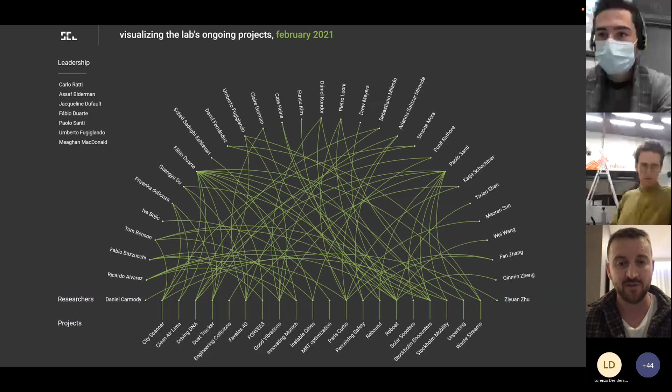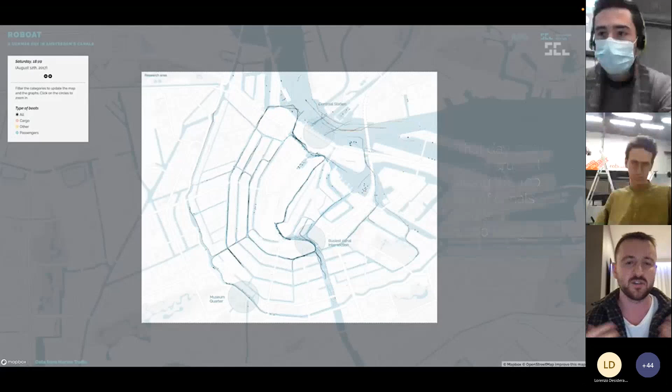The project is based in a very complex environment, the Amsterdam canals. These days the canals are mainly used for social boating and tourists, but historically they were a huge part of the urban fabric in terms of logistics. Over time this shifted to the streets. So what we're trying to achieve with Roboat and digital technology is bring back this importance to the canals of Amsterdam by creating the first fleet of autonomous vessels.

I'm going to play a very short video explaining a little bit more about the overview of the project and also the two full-scale prototypes that we've built.

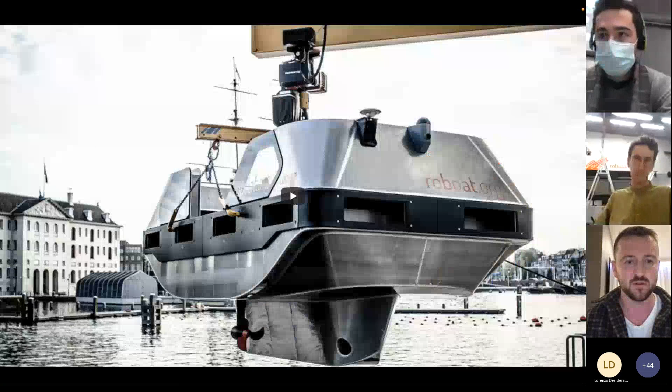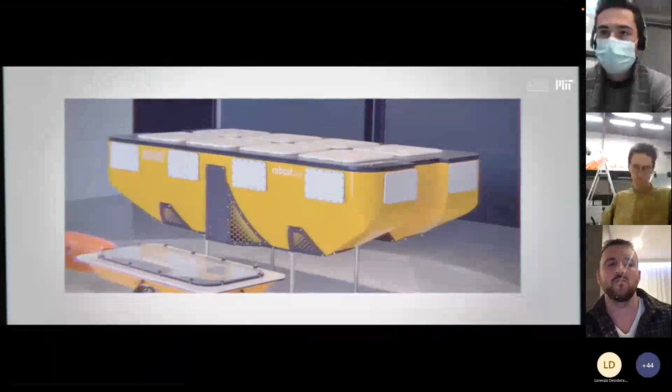This is Lucy. Lucy is a Roboat, a fully autonomous, zero-emission boat that operates on urban waterways, and she can change the way cities work. As congestion and emissions continue to rise while cities continue to grow, the existing infrastructure of many cities struggles to keep up. Roboats offer a solution by moving road traffic to the water, bringing passengers from A to B, or as an on-demand boat taking you anywhere you want. They can also help the city as a multi-purpose workboat. Take Crystal. She is equipped to collect household waste to free the streets from heavy garbage trucks. Roboats are fully autonomous, so they navigate without a skipper and can operate 24/7. In order to sail by themselves, Roboats need to perceive their environment and recognize objects such as bridge pillars, floating objects, and other vessels. The primary source of information comes from a LiDAR sensor, but Roboats are also equipped with cameras, GPS, and a digital compass. Roboat's onboard computer combines and processes all of the data and runs the Roboat software so it can successfully complete its mission plan. After 5 years of development, testing, and experimentation, we have now successfully enabled autonomy on the full-scale prototypes. Roboat is ready for the next step. Join us and let's unlock the potential of urban waterways together.

As the video mentioned, there are various urban functions we've been creating with the platform. One is moving people, having Uber-like robots, but also in terms of moving goods and deliveries, we could create on-demand Amazon lockers throughout the city, which would remove the need for large delivery trucks in Amsterdam causing congestion and high emissions.

One interesting use case is actually using these boats to create on-demand, dynamic infrastructure. Instead of having high infrastructure costs for bridges and platforms, these boats can respond to human behavior in real time. Depending on where human traffic is forming, these bridges can help alleviate congestion.

One of our more developed use cases is using Roboat to collect trash on the edge and bring it to the incinerator. Similar to goods and services removing the need for delivery trucks, this also removes the need for trash trucks, a large contributor to emissions in Amsterdam. People would drop trash into Crystal at the port, and it would autonomously drive to the incinerator, constantly collecting throughout the canals.

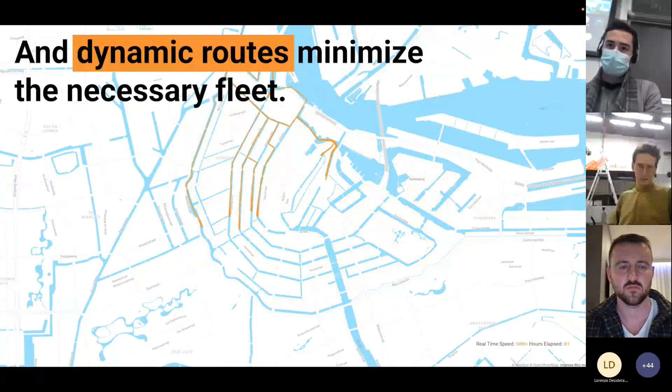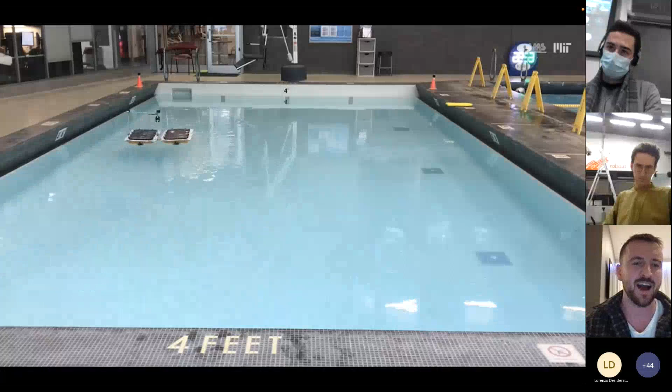Put a little bit more back into the robotic engineering, and we were doing many tests through the first four years in the MIT pool. This is us testing the highly used quarter scale. I think we built over 50 of these little boats, which allowed us to test not only different configurations and shape shifting, but also the navigation.

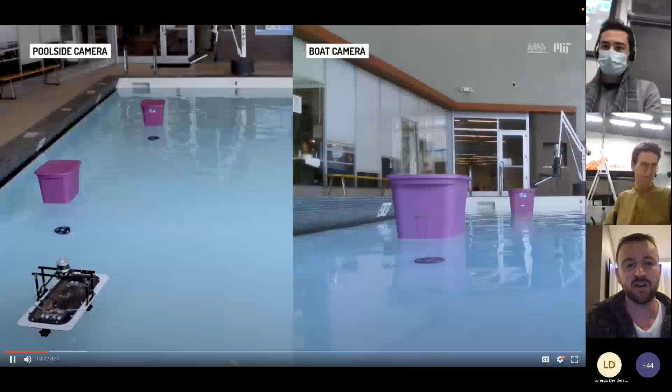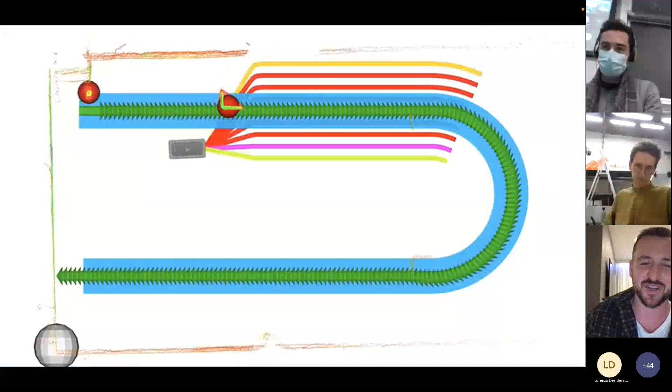And what we did in the MIT pool was to avoid not only fixed objects, but dynamic objects. If you're an MIT researcher or any robotic engineer, I would promote that when you do these algorithms, you put yourself in danger. So on the left, you see these two static bins. And this is one of our researchers, Wei, who was brave enough to put himself on the line to avoid the robot. Luckily his algorithms had worked successfully not to take his head off.

But this is just a very brief introduction into what Jonathan will take a deeper dive into. These boats are basically sensing platforms at the same time. It's not just the case of moving from point A to point B or creating an urban function. It's also a case of trying to utilize the various sensors that we have on these boats for social good.

One of the key ones that we have is actually a water quality sensor that we've embedded into the boat, so we can start collecting hyperlocal water pollution data to start being able to clean the pollution in the canals of Amsterdam. I'm just going to finish on this video, which again is a bit of an introduction into how these boats perceive and navigate through a complex environment such as the canals of Amsterdam.

It uses a combination of LiDAR and computer vision. The LiDAR is just being able to extract distances, and then if you combine that with object segmentation and detection, you're able to understand if it's a boat or a tree.

And like I said, these boats are sensing platforms. So one use case for utilizing LiDAR data is maybe to analyze the structural deficiencies of bridges, or in such a unique context of Amsterdam where you have these 17th century houses on the side, we can actually start to see over time if these facades are starting to shift, creating a bit of an early warning system to structural deficiencies throughout the city.

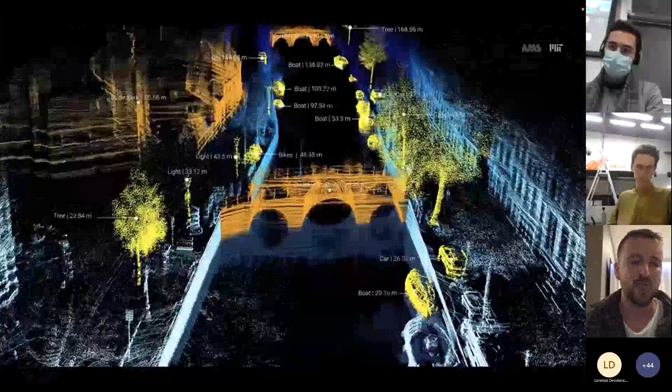You can also start analyzing the ecology of trees, understanding when these leaves start falling off at certain times of the year. So it's really trying to open up more aspects and more questions. What can we do with the data that we collect from Roboat for social good and making our cities more livable?

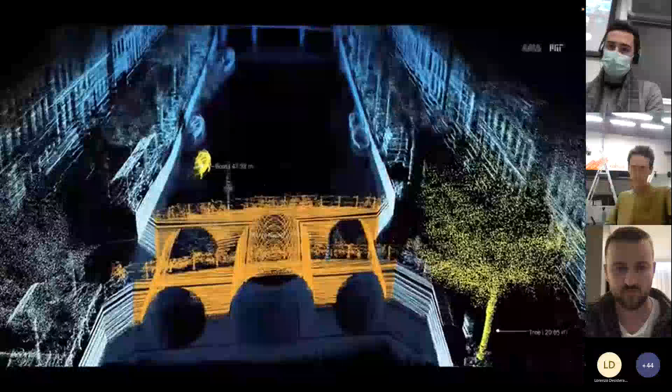Perfect, Tom. Thank you. Let me take over from here. One second. I think I'm not visible anymore. Is this possible? I think it automatically turns off, so we'll have to do with this. You can see my screen now, right? Yeah, we can see it.

Perfect. So thank you, Tom. I'll take over from here. My name is Jonathan, and I'm part of the Amsterdam Roboat team, which is part of the AMS Institute, Amsterdam Institute for Advanced Metropolitan Solutions. Within AMS, we are part of the mobility and logistics track here at AMS.

AMS is located in the city center of Amsterdam. Can you see my mouse, by the way? Is that visible? Yes, we got it. Perfect. So I will point at a couple of things. This is the AMS building over here.

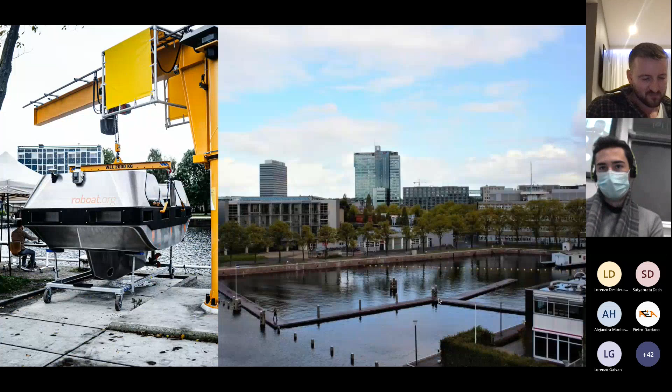And if we take a closer look, we have this nice section of water, which is actually a private area. So we can use this area to test our full-scale boats because we have a nice yellow crane installed half a year ago. Right now I'm sitting here in the second garage door, and whenever we go out testing, we just push the boat out, take the crane, and put the boat in the water. It takes about 10 minutes. That allows us to very quickly validate all the software that we wrote for the boat, which is very convenient.

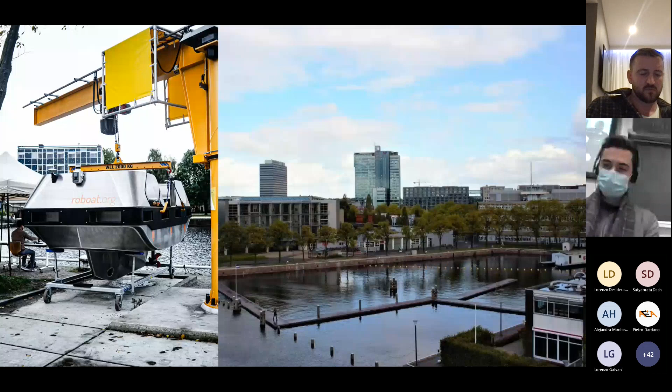I joined the project back in April, roughly 6 months ago. When I got here, Pietro, the designer of the boat, had the privilege to christen the first full-scale boat, called Lucy. This was really the start of the testing period of the full scales. Tom mentioned a lot of testing has been done on the quarter scales, the smaller boats, but the end goal of the Roboat research project was to have full scales operable in Amsterdam. So I joined at a very interesting time.

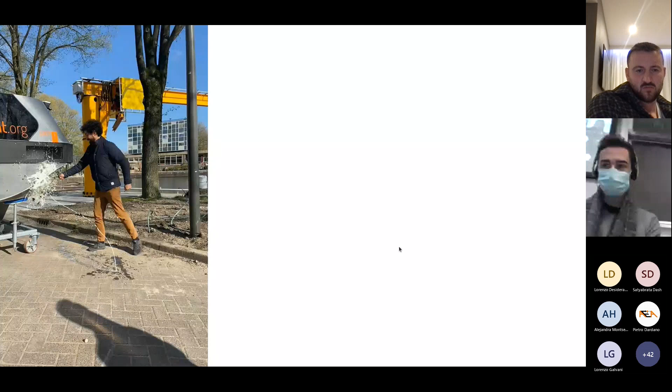Back in October, we had the Roboat demo days, where we showed off the capabilities of our 2 full-scale boats. It was a great event.

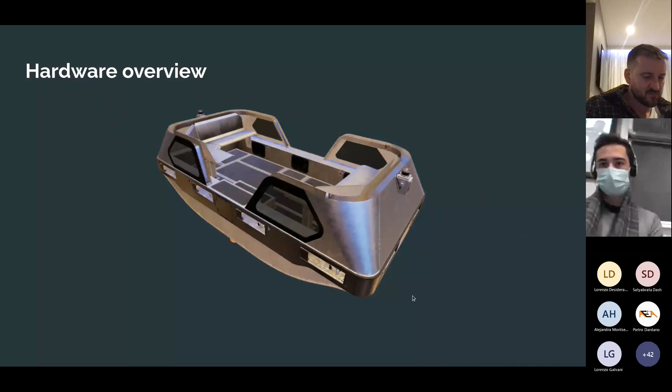Let's see, where are we? Let me first give a hardware overview of the boat, in case you're not familiar. So this is Lucy. What's interesting about Lucy is that she has a universal hull design. Our other boat, Crystal, is equipped with a garbage module, but the hull design is exactly the same, so we can switch the use case of the boat by simply switching out the top deck, which is fairly easy to do. So we have a multi-purpose boat, which can be used for several use cases.

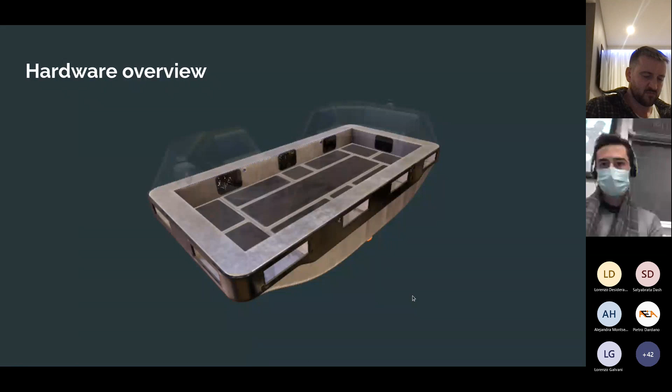More on the hardware side, we have a 10 kilowatt-hour battery, which lasts over 24 hours of operation, and we can even put a second battery in to allow for even longer durations. For the drivetrain, we have 2 main thrusters, which are torpedoes, pointed forwards. Next to that, we have 2 bow thrusters pointed sideways, and this allows for holonomic movement, which is very convenient, for example when docking.

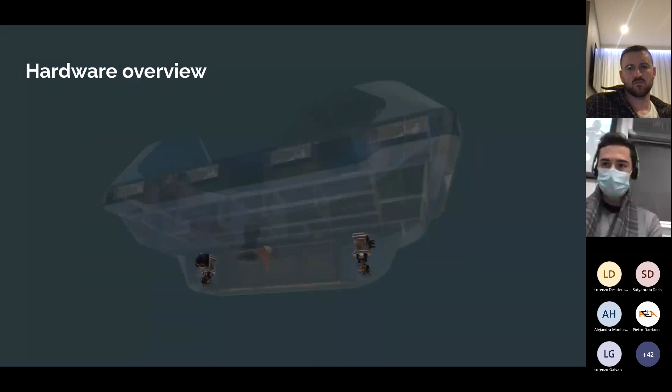More on that later. Next to that, we have a latching system installed, which are mechanical arms that allow the boat to autonomously dock and latch onto the wall. These latches are passive, so the battery can turn off and it can charge itself via capacitive charging. A very nice feature to have.

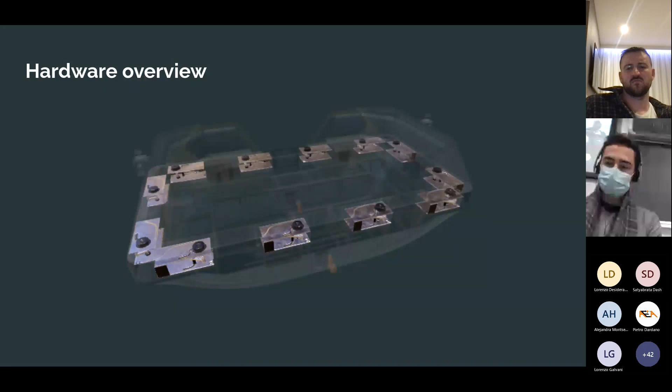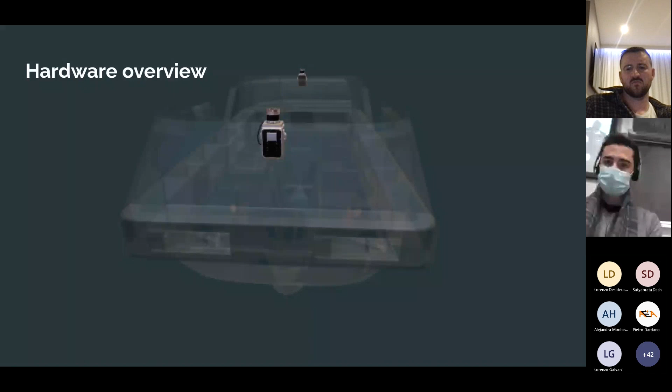Other than that, we have a range of sensors, a couple of them illustrated here. We have a LiDAR. In the black box here is a camera and an IMU. And we also have 2 GPSs for localization.

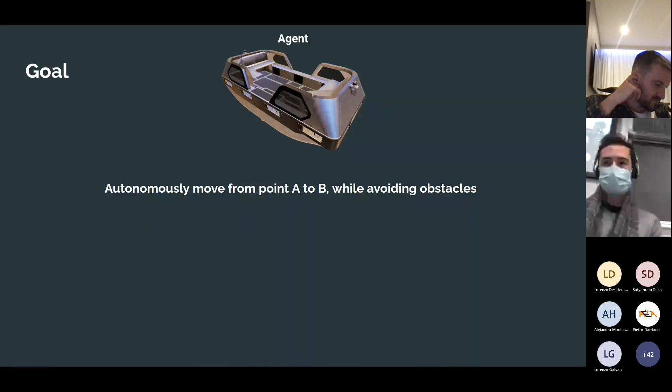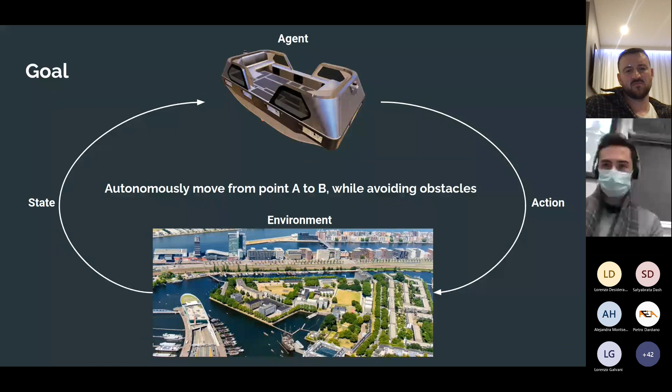And of course, what is the goal of Roboat? It's to autonomously move from point A to point B while avoiding obstacles. We can put Lucy as an agent which has to interact with the environment, in this case the marine terrain here in Amsterdam. She can sense the environment or her state through her sensors, and she can operate in the environment through the use of her actuators, taking action in that. What's important here is that the boat is, of course, autonomous.

So let me run you through the software stack, how we do this. Any regular boat with a joystick or manual controls will have a hardware interface and a UI through which you can interact with it. So let's say we have a boat with 4 thrusters. We can steer her with levers that determine the thrust delivered by these thrusters. However, we want to sail from point A to point B autonomously, and therefore we created the following software stack.

So instead of putting these forces manually into the system, we provide a waypoint, as we call it, to the coordination layer of Roboat. This waypoint is then passed on to the global planner, which is sort of a Google Maps for the waterways. So this will determine a rough path.

Away from point A to point B, as you would get it on Google Maps. And this map is a static map, but of course in the environment there are dynamic obstacles which we need to sense. So this global path is passed on to a local planner, which takes the LiDAR data, constructs a map of obstacles.

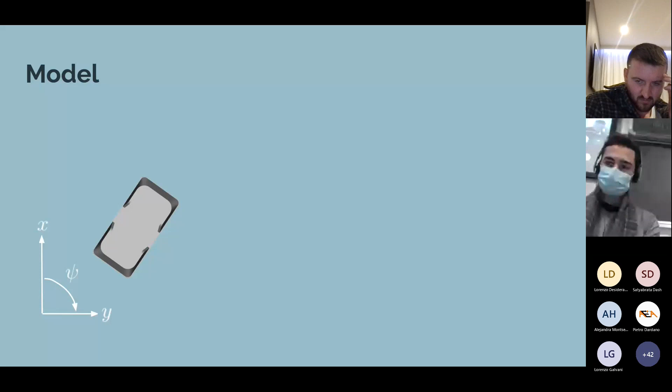The first 3 are in the map coordinate frame, as you can see here. X is pointing forward, Y is pointing to the right, and the yaw is clockwise. So Z is pointing inwards the screen.

Then the second set of states is a bit more involved. These are determined by a similar equation as the manipulator equations. I assume you are familiar with that. The only difference is that V is already the velocities here. So V dot is the accelerations, and other than that, it's the same.

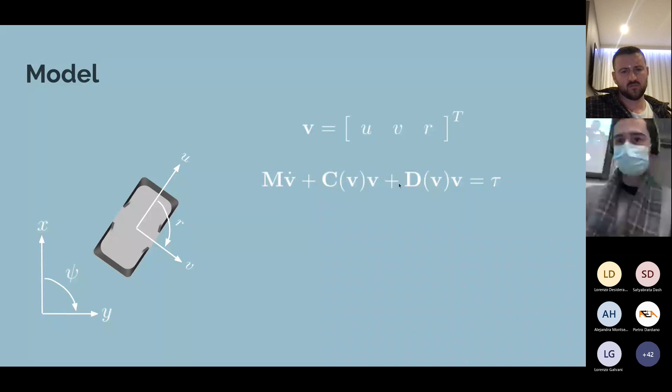What I found surprising when I started this project is how simple this model is, yet how effective it is. So the mass matrix here is just a diagonal matrix with the mass terms on the diagonal. The Coriolis term here, we actually ignore it. So this is 0. And the damping matrix is also just linear terms, which to me was surprising at first.

Since hydrodynamic drag scales with velocity squared. But since we are operating at low velocities, this quadratic term does not dominate yet. We usually sail around at approximately 3-4 kilometers per hour. So a linear term for this damping matrix is perfectly fine. And it's again a diagonal matrix with the damping terms on the diagonal.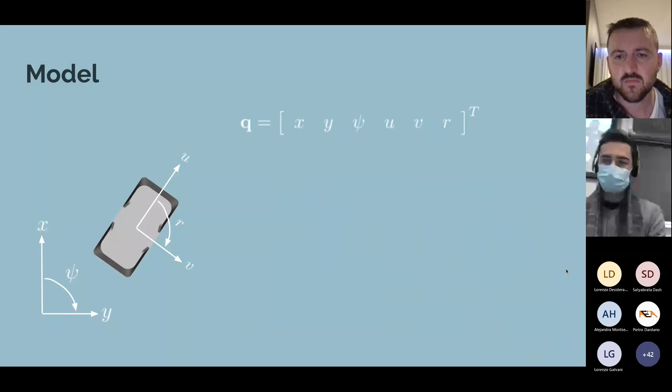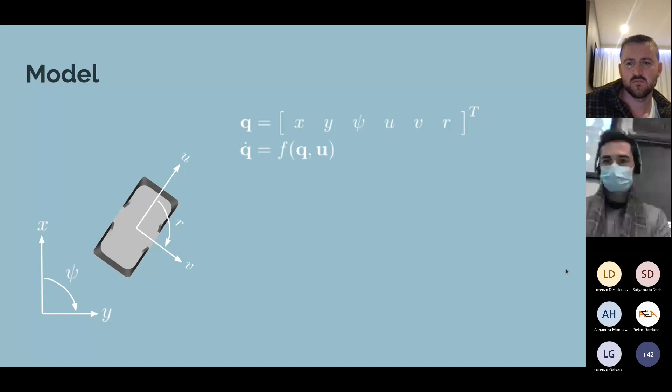That brings me to the full 6-state model we have. So again, x, y, yaw in map coordinates, and u, v, r in boat coordinates. The dynamic model is slightly nonlinear because of those first 3 terms, but the rest of the model is actually linear. This is just a summation of what I just explained.

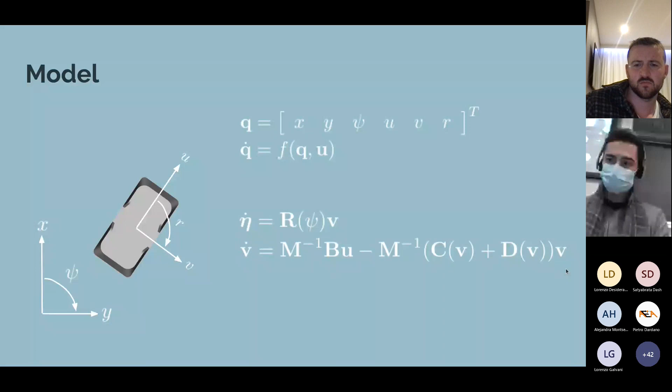With this model, we deploy our control strategy, which is nonlinear model predictive control. I hope you are familiar with model predictive control. Otherwise, I will give a very brief overview, which I hope is clear.

So in order to determine which forces the thrusters need to give, we have an optimization problem with u as the decision variable, and the equation to be minimized is this cost function J here on the top, which consists of the states and the future states of the boat and the control inputs over the control horizon.

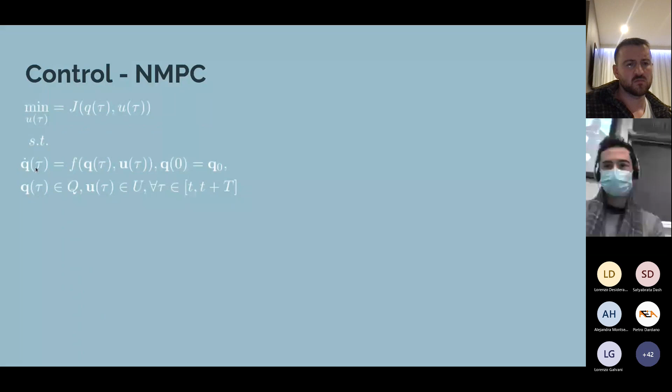And this optimization problem is subject to a couple of constraints. So we have the dynamic constraints over here. Wait, let me first give a better overview of what model predictive control actually is, which is shown here.

So model predictive control at each time step, here time step k, calculates a predicted future of the boat's trajectory and tries with the decision variable u to minimize the error between the reference trajectory and the predicted trajectory. Then if the optimization is completed, the first control input is applied. The horizon is shifted to the right by 1, and we do this whole optimization again.

And this way we can have optimal control with state constraints and input constraints. So coming back to the equations here on the left, this J is the cost function to be minimized, which is subject to the model dynamics, the initial state where we are at that time step, and also to some state constraints and input constraints.

For example, we have a maximum torque on the thrusters, which need to be adhered to, otherwise they will overheat and destroy themselves. So that's not nice. And using this model predictive control framework, we can ensure that the forces are never higher than we want them to be.

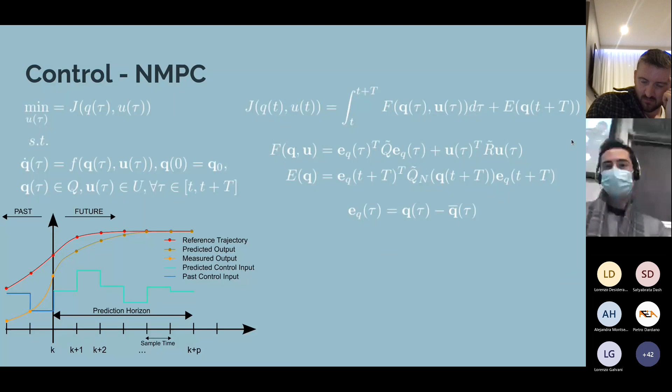And so enough equations. I'll just show you what it looks like in sim, which is like this. Over here you can see the boat in our simulation environment. The green line is a series of poses, which is the path that is given to the robot, and the purple line of arrows is the predicted output.

And as such, we can move through the water and follow the line we give it.

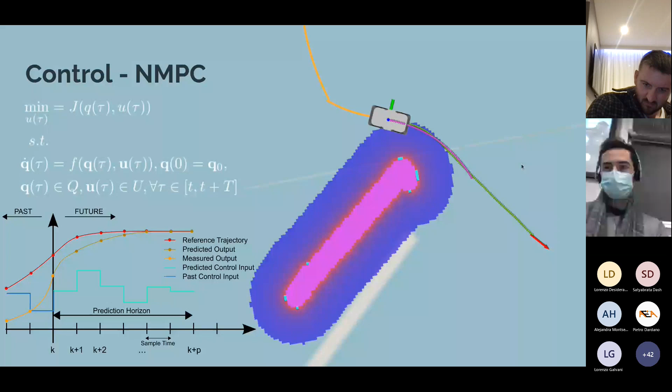Next up, I wanted to talk a bit about how we do localization, which we do with an extended Kalman filter. I presume the Kalman filter is known by control students. The extended Kalman filter is a nonlinear version of the Kalman filter, which linearizes the model around the current predicted state, and then applies the prediction step and the update step accordingly.

What is nice about the framework we use, which is ROS, is that we can use external packages. For this localization, we use the excellent Robot Localization package provided by Charles River Analytics. It is designed to fuse an arbitrary number of sensors, which in our case are an IMU and actually 2 GPSs. I think when I got here, there were already 2 GPSs on the boat.

On the quarter scales, they had a single GPS, but they had a lot of trouble getting accurate heading for the boat, since the IMU is very prone to drift, and it was not sufficient enough for our use case. So the engineers at MIT decided to go with 2 GPSs, from which we can then calculate a normal vector, and that can be used to calculate the heading.

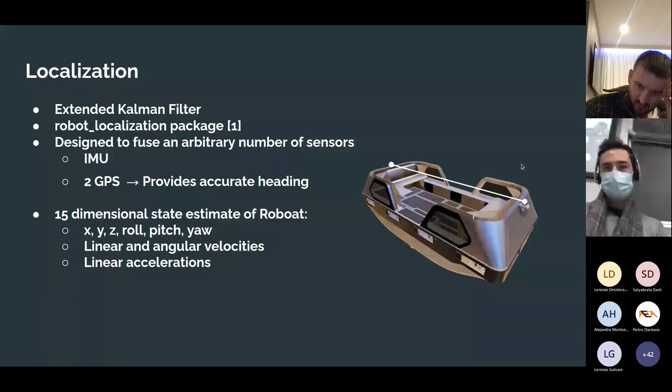Some insights on difficulties we have at the moment: these sensors we use, an IMU and 2 GPSs, are not always good enough at this moment in time. You can imagine, for example, sailing under a bridge, you will lose the GPS signal quite quickly, surprisingly quickly actually, in which case the odometry cannot be calculated anymore. So for that reason, we are currently looking into fusing LiDAR and/or camera data into the mix to provide a more robust state estimation.

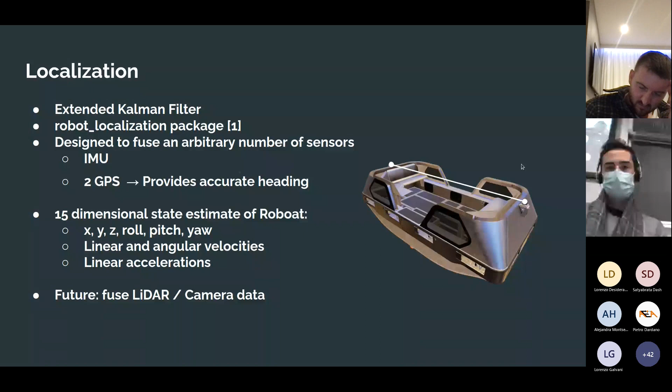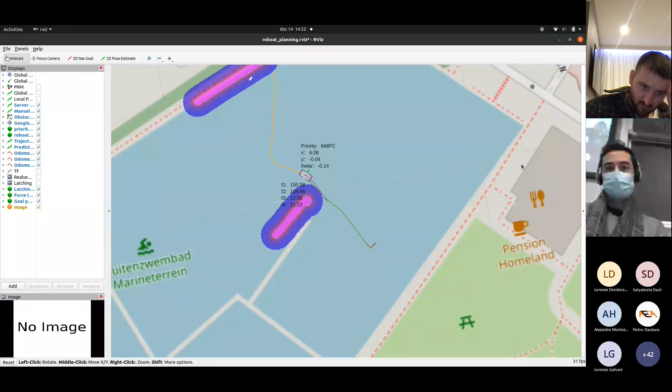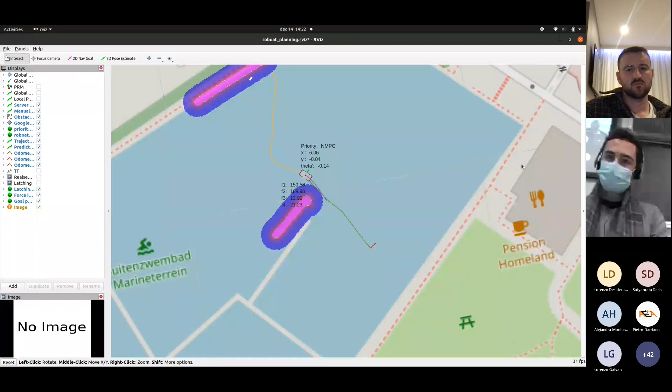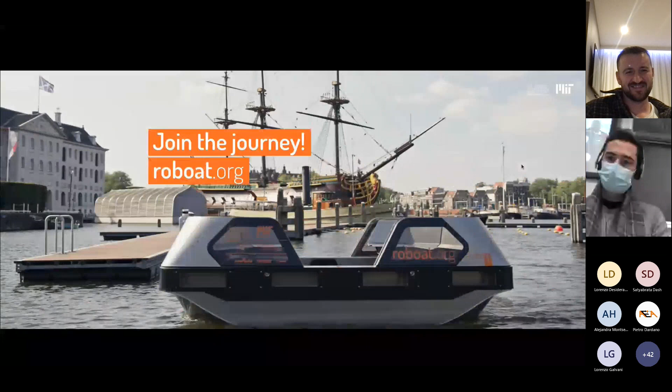And with that said, we're currently at a very interesting stage of this project. So we have boats that are able to sail, as you can see in the last part of this video, which Tom skipped. But we are able to confidently sail around in the Marineterrein, avoid obstacles such as the platform you see in the back. And a lot has to be done as well in order to make these boats fully operational. But exciting times ahead, I would say.

So the next challenge for Roboat is really to go into the canals, make the miles, and make the boat safe and usable in the urban area.